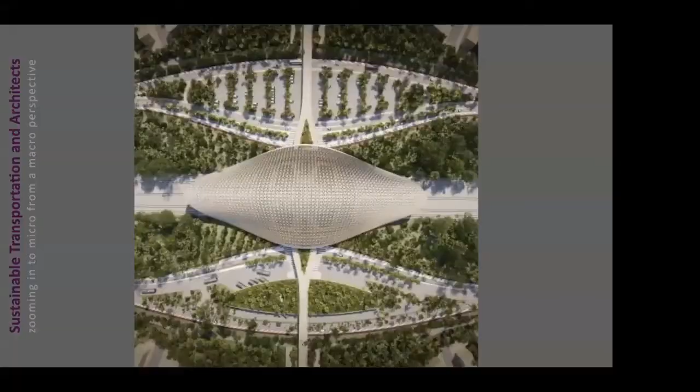So, when I talk about public transportation, like I said, the spine of any public transportation is always a railway. But when you talk about SDG goals, right, you're not specifically talking about any transit system. It is a goal that is at a macro level, at 40,000 feet. So the relationship with those goals and how those goals can be pragmatically applied or come to fruition is what I'm trying to dissect today.

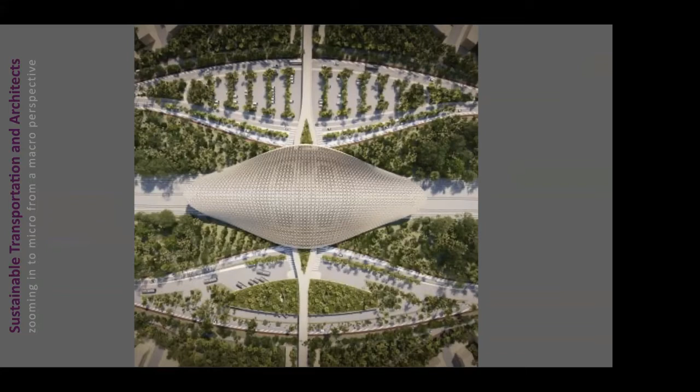Now, I do not know whether that is possible here, but is it possible to understand how many of you are specialized in public transportation or have exposure in public transportation? Is it possible for me to know? Is there a system that we can? Maybe sir, we can go through the chat window if they can type, sir.

All right. Okay. So I'm assuming that this is a mix of people in the audience. There may be people who are much more well versed with what I'm speaking about. So please bear with me if I'm repeating stuff that you already know. So let's start with

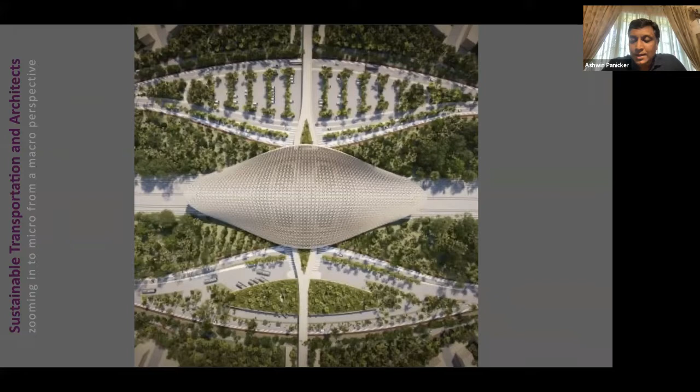SDG goals, right? So SDG goal 11 talks about cities and urban conglomerates, urban settlements, which are inclusive, safe, resilient, and sustainable. I mean, everybody knows that. But essentially, what that means is it has this three-pronged approach, which the entire sustainable goal is approached with, which has an effect on the society, an effect on the economy, and an effect on the environment. Right?

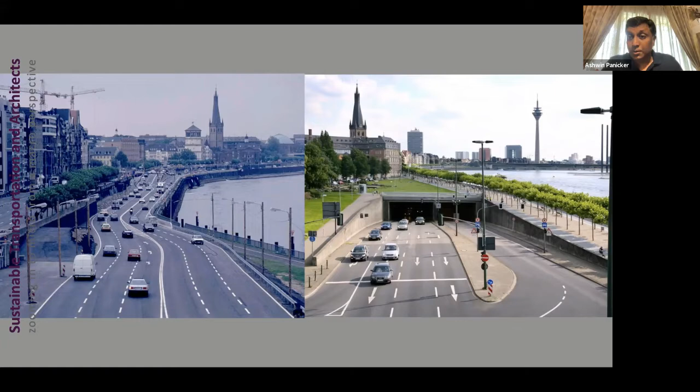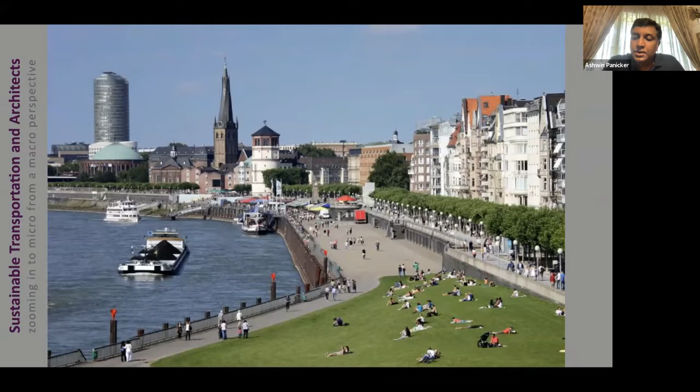Absolutely yes. Unfortunately, that is not the entire essence of SDG Goal 11, because this kind of intervention by urban planners and designers and architects is more of a rich man's problem. They were solving a rich man's problem or a developed country's problem. Good to see, but not applicable for a place like India. I'm not saying not applicable, but when you consider other aspects of finance, etc., it may not be applicable for India, not yet, at least not now. We have a bigger problem. This is more like what we need to tackle, what we need to address.

And therefore, SDG 11.2 specifies scenarios like that. So SDG 11.2 is addressing areas of the world, populations of the world, which have a huge divide between the haves and have-nots. So essentially it is meant for developing countries like us. 11.2 of the SDG goal is about safe, affordable, accessible, and sustainable transport systems.

Now what that means is, if you understand that from a practical point of view, there are two kinds of people. The people who have to do long commutes through congestion and a generally miserable way of transporting themselves from one place to the other, versus a set of people who have a very short, swift, and affordable commute. So this is the gap that SDG 11.2 is trying to bridge, and that is the key essence of this exercise.

So what does it mean? What is that safe, accessible, environment-friendly transportation system? You must have seen this several times. This goes around on social media a lot, and everybody understands this principle. So is it about reducing the number of vehicles on the road? Yes, but it is also no. The answer is no, not exactly that alone.

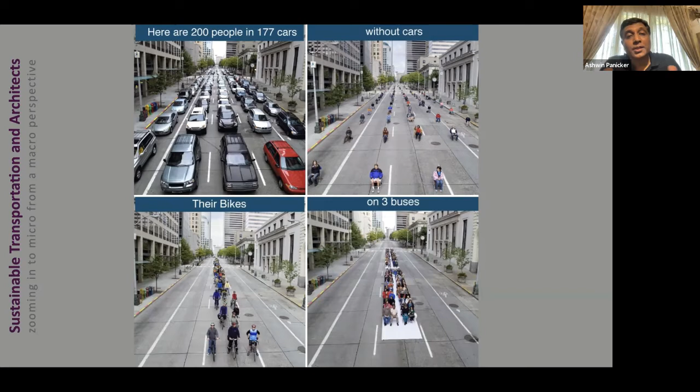This is the solution of engineers. What you see here is the solution of engineers, right? Or maybe it's a completely technology-driven solution. I mean, there is another line of thinking. Maybe if you give it to your automotive engineers, probably all of these 177 cars would be Tata Nexon or some sort of EV now, and then it would be considered environment friendly by some. But that's not what we are aiming for, right? Essentially, what we are aiming for is that inverted pyramid of sustainable transportation system.

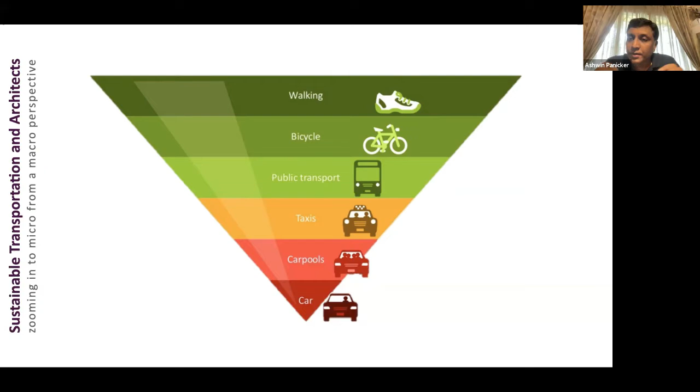So I am convinced, with my experience that I have had with similar projects, that this project, although on paper it met a lot of these goals, in reality it did not achieve what it could have achieved because of lack of designers and architects that should have been part of this. It looks like an engineer-driven project.

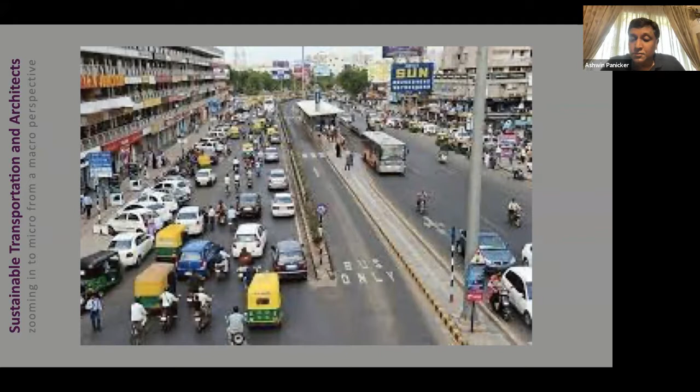Now, I'm not sure how many of you are familiar with the case study of Bogota. Unfortunately, we are not a live audience where I can have that interaction. I'm assuming a lot of people know. Nevertheless, I thought that it would be a good thing to just take a look. I'm going to run a short video. I'm not going to keep it too long, maybe 3 minutes or 4 to 5 minutes.

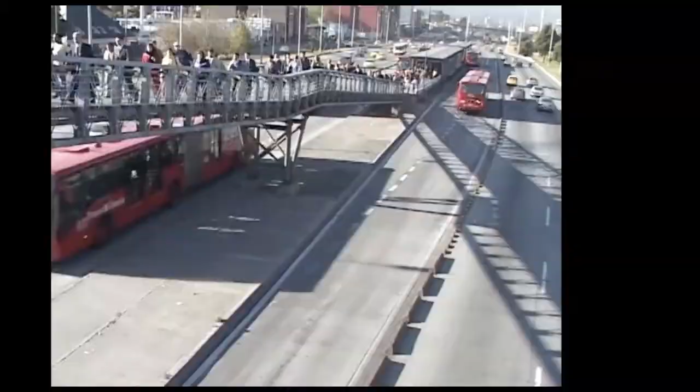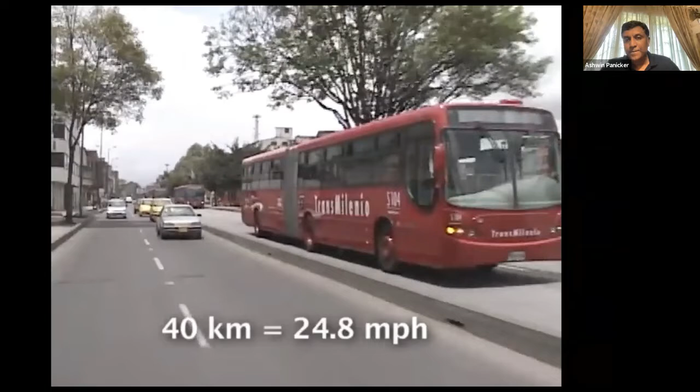Wow. This central hub that we visited dispatches the buses. It follows them around the city in real time. They can communicate with drivers individually. You see a photo of the bus driver pop up on the controller's computer screen when he's getting ready to talk to that guy, if buses are starting to bunch or stack up together.

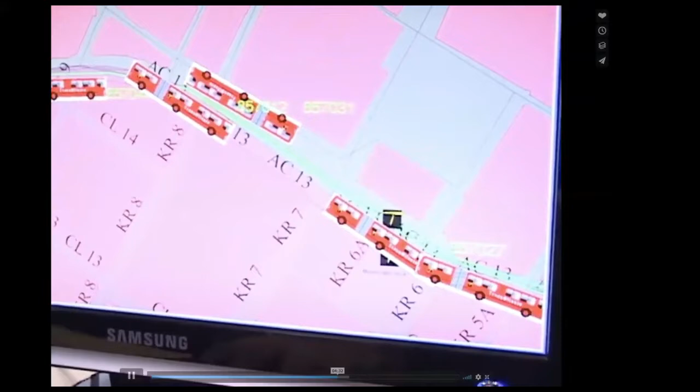Most of the Transmilenio system are these double long red buses, but traveling around through city neighborhoods, you see these much smaller green buses, and those are called feeder buses. What the feeder buses do is they travel through neighborhood streets and pick up people and take them to the bigger bus stations.

One of the interesting things about the green feeder buses is that they're free. You don't pay for your Transmilenio ride until you get to the bigger bus station. That's one of the things that really speeds up the loading and the unloading, kind of like the subway in New York. You're paying for the bus in the station rather than...

Hello? So I hope you can hear me. Hello? Yes, yes, sir. Yeah, so I'm cutting that video. It's pretty long, maybe another 10 minutes to go.

But then I wanted to cover a couple of things that they have done very well. This is a perfect example of taking a technology which is considered to be inferior to a metro system, but that is easily applicable in a city like Bogota, and applying a number of factors that we seem to be missing in projects that we implement in our part of the world, which is seamless connectivity, the last mile connectivity, intermodal transfers.

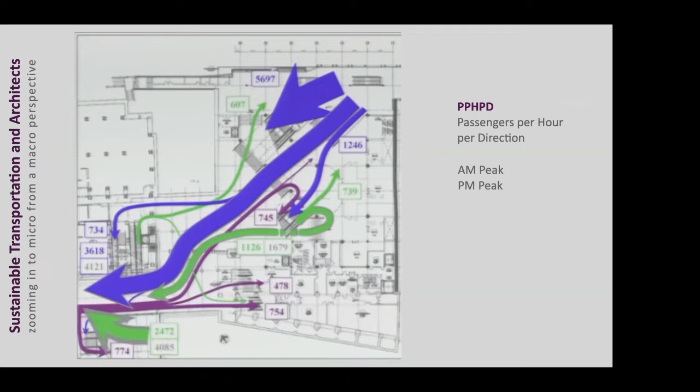So to give you perspective, this could be very, very different. We have our Bombay Shivaji Terminus, earlier called Victoria Jubilee Terminus, which is one of the largest stations in India, and carries, I believe, about 2.5 million people a day. Now compare that with Shinjuku Station in Tokyo, which is considered to be the busiest station in the world. They cater to about 3.5, nearly 4 million people. 4 million people in a single day through one station, and that is multiple times the population of some of the big towns that we know of, right? So the scale can be very, very different.

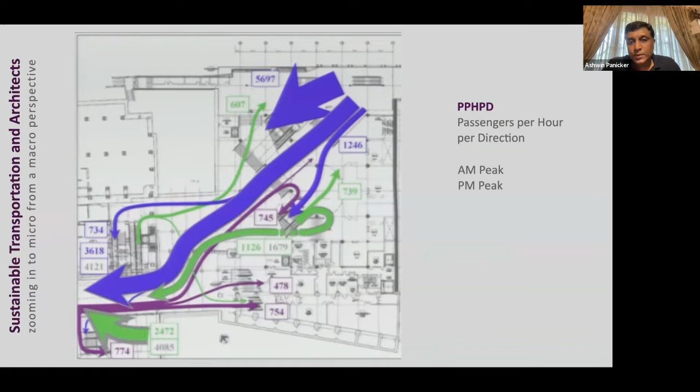So compare that with maybe Bangalore Metro or even Cochin Metro, where we are talking about maybe 4,000 or 6,000 persons per hour per direction. So the scale can be very different, but essentially that is your unit where you start with, right? So that is where you start putting things into place.

So typically this is where the question arises: where do architects come in? At what point do architects come in into a project? Now, I'd like to share a little of my experience when I went to Singapore. When I joined the Land Transport Authority, it had a legacy of having been, from the British colonial days in Singapore, the Public Works Department, and that eventually evolved into the Land Transport Authority it is today. But what that also meant is it was a very engineer-driven organization. The decision makers, the people at the top, were all engineers.

I started in the architecture department. We had a very strong architecture group, mostly British people who were working there at the time, but extremely efficient people. However, what I found is it was always a tough call to make a decision in a project, because you have a massive team deciding on all aspects of a project, and it was engineer driven. And architects were mostly, at least in those days, considered as people who would decide the color of the station, or maybe the furniture on the platform, or the bollards on the walkway. I mean, we were the interior designers to most of the engineers. That to me was very annoying.

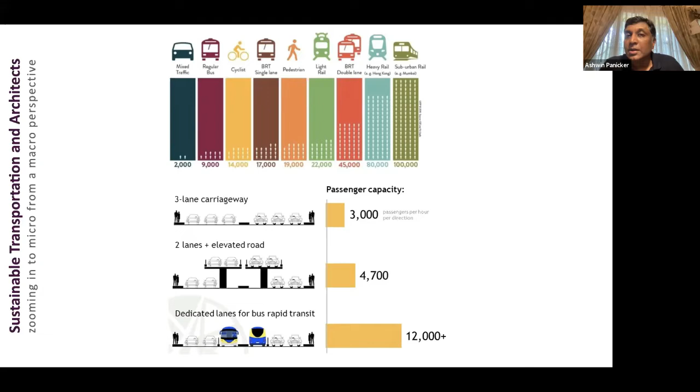Please do not misunderstand me. But then there is an element of sensitivity. There is an element of detailing that architects are able to bring in. And so that's the point where you come into the project and you make interesting scenarios. As an architect or a designer, you start opening up interesting scenarios which may not have

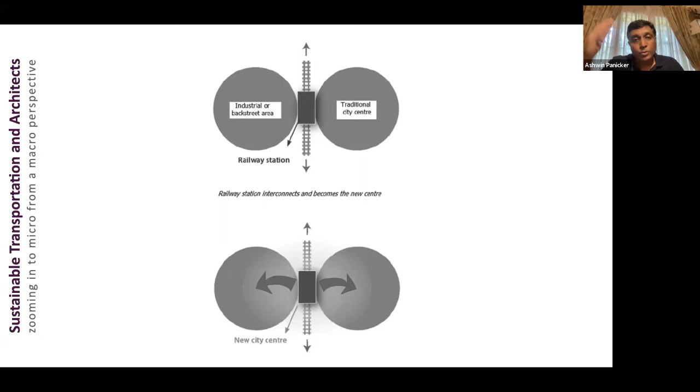been considered before. For example, you could have an architectural solution which could possibly bridge two diverse areas of the city and unify them, just like in the sketch that is shown on the screen now. So when you want to go into that kind of detailed solutions, certainly architects do have a better grip than people who look at it from a huge macro scale.

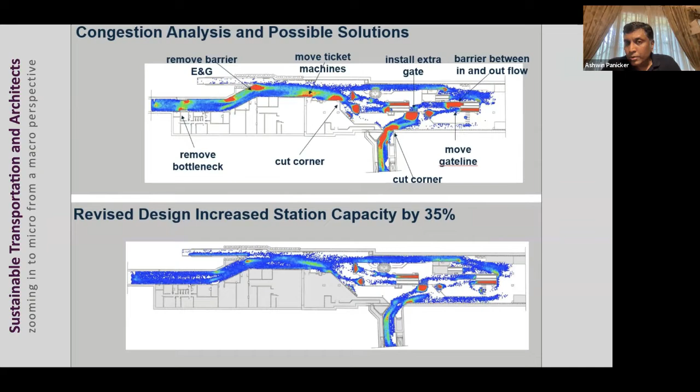And then, of course, before you make any major decisions, you start analyzing the impact of your structures, or how you plan to intervene into that ecosystem, into the environment, and how your built structures are going to affect the pedestrian movement or the passenger movement or the vehicle traffic. You start analyzing that, and you start massaging it and making it as smooth as possible. I will cover this a little more in detail a little later.

This is also, I believe, the best time for interacting with the community, because as public transit architects, you are touching human lives much more than anyone. You are interacting with the community, with the culture of the place, and you can make a positive impact. This is a project that I was involved in. It's called Hougang Station in Singapore. It's somewhere in the suburbs of the city.

What you see on the wall are actual handprints of the local residents. So 5 years before the project went onto the ground, we established an art and transit project, and we started interacting with the local people. We involved them, the community participation, in certain decision making of the project. As part of that exercise, we went on for 6 months, I can't recall how long, but a pretty long time, where we got prints of actual people on rubber molds, and later all of those molds were translated into concrete panels like what you see here.

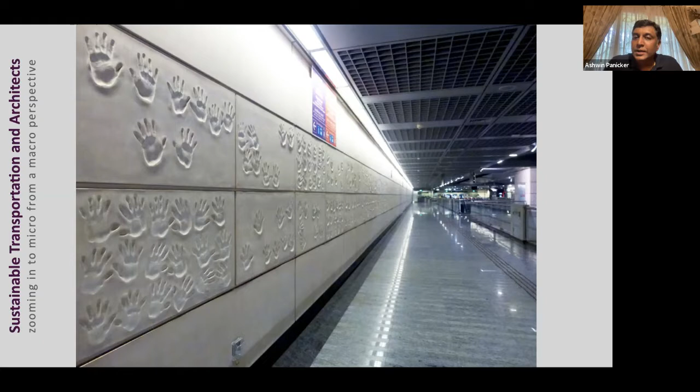And it is very interesting. I used to live near this station for some time, and it was very interesting to see common people walking by and just trying to see, hey, is this my handprint? As a result of that, the sense of ownership of the local community towards that station is far higher. So I'm just showing this as an example of the difference a little bit of architectural intervention can make to the community in inserting a public transport system.

Places. We all belong to places, right? The roots of our identity are places where we come from, places where we studied, places we met our girlfriend or wife. Places have a huge impact on our lives. Therefore, as designers and architects, we have a responsibility in how we intervene a public transit system into an environment. Some examples from around the world of how each of these has been built, and each of these has a statement. These are all statement pieces.

Victoria Terminal was obviously a statement of colonial powers. It was a statement to show who they were. The project on this one, Serangoon NEX, was a project that I worked on. This was a suburban town in Singapore that was revitalized with a transit-oriented system, where the transit systems, including a bus interchange and a couple of metro lines, were superimposed with commercial and residential facilities, and it transformed the whole place. And of course, this is the Pune MRT system in our country, which is trying to establish a new language, a new sort of paradigm in that environment, looking forward.

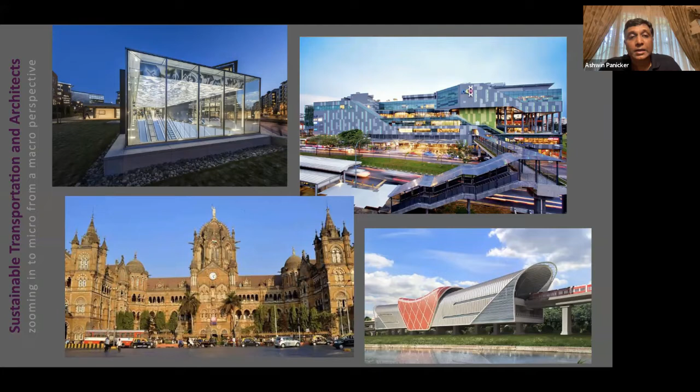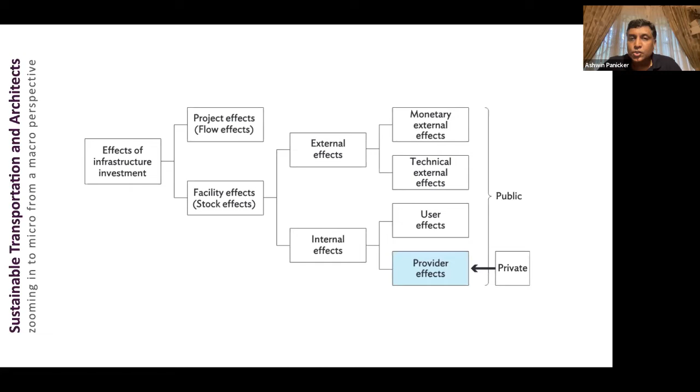Monetary external effects are things like, when you put in a project, what would be the appreciation of the land around it? What new commercial ventures would come as feeders of this project, etc. So what I'm saying here is, all of this has a bearing on what architects can do, should do or would do. All of this has an effect on what we can control, manipulate or contribute to.

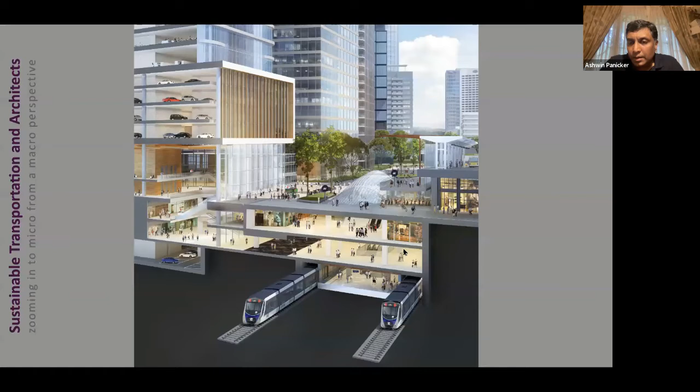Best example for that is transit-oriented developments, right? So this is a success story in all parts of the world. This is a cross section of transit-oriented development. It's of course a conceptual scheme in Jakarta, Indonesia, where the metro system comes in, and there is a residential complex and commercial complex all coming together and utilizing the open space on the top to create green spaces for the city and enhancing the quality of

life there. So transit-oriented developments, in my opinion, are the ones that we should be looking at in every urban environment in India, particularly in India where we have high densities of population and land is very scarce, and we need that kind of revitalization in more cities. One country that has taken this to almost a level of perfection is Hong Kong. It's not a country anymore, by the way.

So this is, I'm not sure how many of you are familiar with this, but this is the famous Kowloon Tower in Kowloon, overlooking Hong Kong Bay. This is one of the best transit-oriented projects that I think ever has existed. So you look at the number of levels that are going under. You have the MTR, or the local metro, that is in the lowest basement, and then on top of it you have an airport express line.

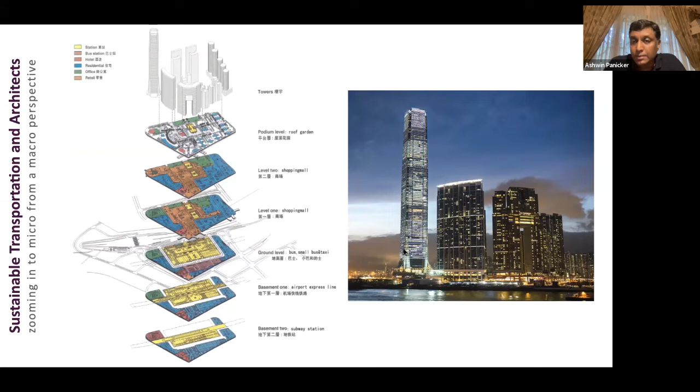So seamless transfer, seamless modes, interconnecting several modes of transportation. It is also right next to the water transportation. So this is one of the success stories that we have seen in the world of transit. I'm sure there are several others. Even in India, we have several others. But in terms of having perfected it to near perfection, this project, in my mind, goes right up in the list.

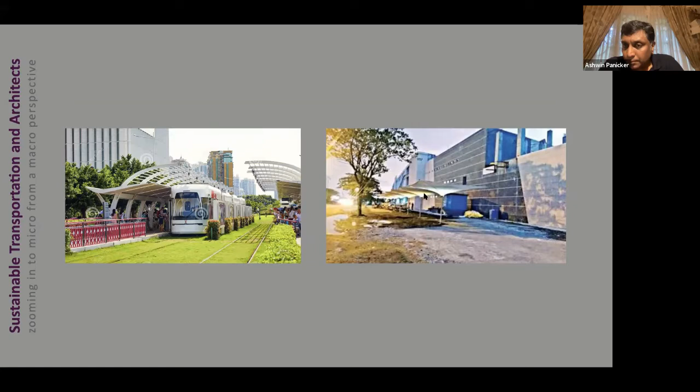We also have very innovative projects, like this one right here in our country. It's Nagpur, where the canopies that you see here are quite an innovation. It captures the rainwater and also has solar panels to give light at the bottom. So even that small little innovation makes a difference to the environment and also increases the quality of life there. So there is no limit to applying environmental factors to a project, not just by choosing the right material. And so there are several things that you can consider.

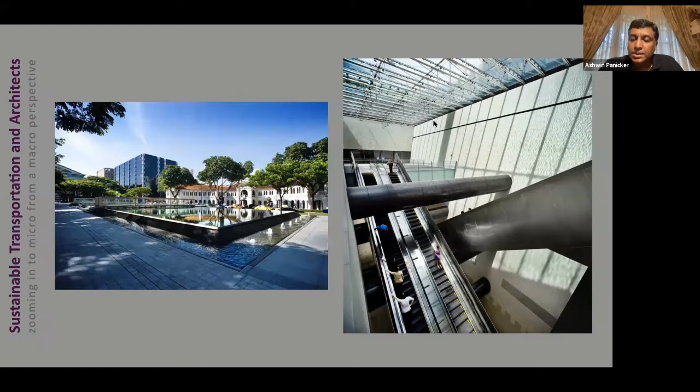The other important aspect, which is a personal peeve, and I believe this is something that all academics in India should give a little more attention to. Certainly my professors, when I was a student, or at least my curriculum, did not provide that kind of impetus on this topic, which is sustainability of assets. That's a fancy way of saying thinking of maintenance.

Maintenance is something which, I'm not sure how it is now, but at least when I was a student and when I was practicing here, never figured very high in the scheme of things in an architectural design project. So for me, it was a new experience when I went there and found that if you're designing fancy spaces as a designer, if you're putting three-story or two-story high spaces, or you have fancy materials that you've chosen for your project for whatever reason, it is also your responsibility to ensure that this has a good life cycle.

This has good maintainability, and it can be maintained with minimal intervention or regular intervention, and it is an architect's responsibility to give that maintenance regime or program as part of the project design. Something which I have never seen, at least 10 years ago, 20 years ago here.

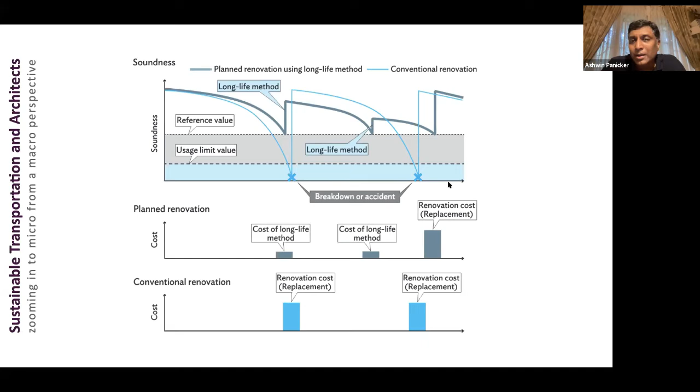Whereas the method that we should be following is a long life method, where there is a clear maintenance regime, and that carries through with minimal cost to the exchequer or the public funding. So this is one of the things that are missing in our system here.

Movement. The most important aspect of a public transit system. Moving people, moving traffic from point A to point B. And it is all about numbers. In my opinion, the prime metric that should define a transit project is level of service. For those of you who are not familiar with level of service, this is a metric that was developed by John Fruin almost 60 years ago, I think.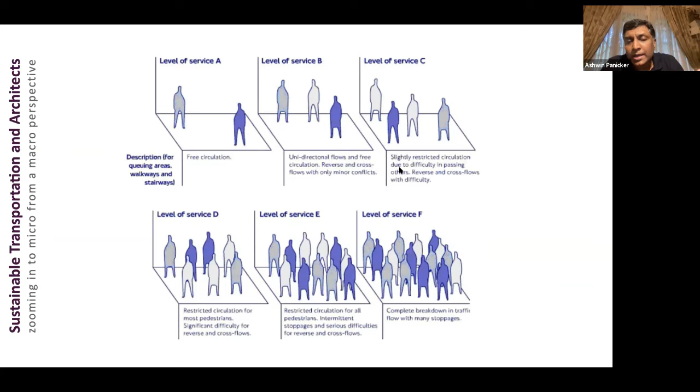This was first adapted as a metric by the London Underground as a standard for ensuring quality of service provided by a public transit system. So level of service is divided in 6 categories, A to F, and as you can see in the figure, level of service A is when you have the freedom in a defined space to move in any direction that you want. There is nothing to hold you back.

You can move at the speed you want. You can change directions the way you want. Nothing to stop you. That is complete free circulation. Level of service B, a certain direction is restricted. Level of service C, maybe more than one direction is restricted, and so on. By the time you reach level of service F, it becomes practically impossible to move at your volition. You would rather be led by the crowd.

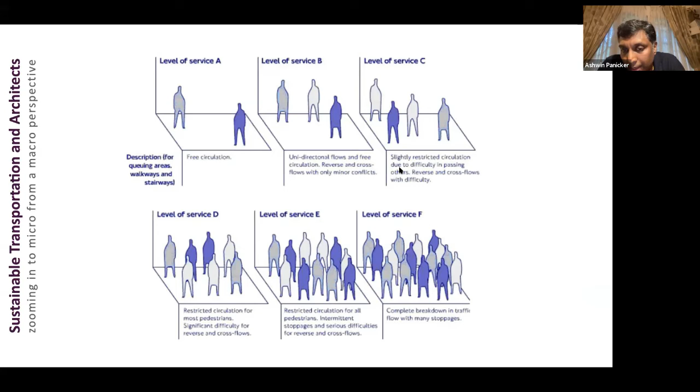And that is the same metric typically used by traffic planners, urban designers, and also architects. It is practically the same thing, right? In the case of pedestrians in a public transit system, you look at pedestrian flow or density. If you're talking about rolling stock, a bus or a train or a tram, you're talking about density. If it's a pedestrian path or a corridor, then you talk about the flow rate. But essentially, the principle is the same.

In many parts of the world, including the metro systems that I was part of, if you reach level of service D, then things have to be changed. A panic button starts becoming active. There are very clear interventions that the authorities or the operators would need to put in place to increase the level of service. If it reaches F, practically everything stops.

Both in Singapore and Dubai, if level of service F is reached in a metro station or any public transit system, the system is shut off, at least temporarily. And that's because it has the potential to become a risk to life. Stampedes can occur. So when you reach level of service F, everything stops.

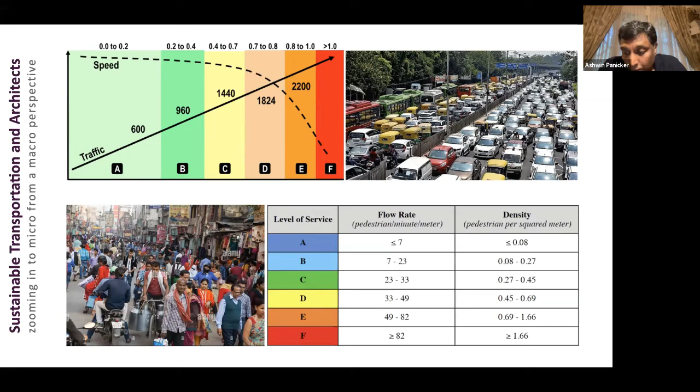Now, how do you tackle this? How do you design this into architectural projects? Today, unlike 20 years ago when I started in this domain, there are a lot more tools available. Computing power and simulation processing power have gone up, and you can practically come up with any kind of simulation. In the good old days, what we used to do was work on pure density, square meter density calculated by formulae manually.

But now you have simulation software where you can actually determine the kinds of personalities, the personas, the avatars that are introduced into a system. So you can design a public transit system or a public space. It doesn't have to be a transport system. The same software can work in the case of a stadium or any public gathering for that matter.

The interesting fact is this pedestrian simulation software or engineering got an impetus. It started developing at a fast pace after a massive tragedy. This is quite a long time ago, 1989, in a county called Hillsborough in the UK. There was a stampede in a football stadium where 97 people lost their lives. Now, it was a simple thing. It was just a brawl or a fight between two people. Somehow the stampede happened and people started trying to get out of the stadium. Everybody reached the doorway at the same time, a bottleneck happened and people were crushed to death.

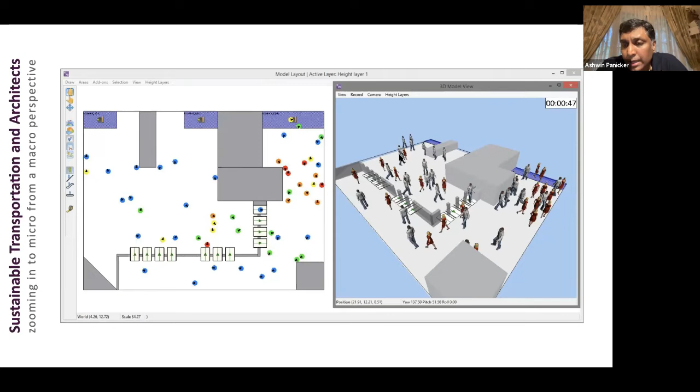So that was the beginning of pedestrian simulation software being introduced into any project that had massive movements of people. I was responsible for introducing this as a mandatory requirement in any transit project in Dubai. It is written into law that if you're having a massive public transit system in Dubai, it has to undergo a pedestrian software simulation. It has huge impacts on saving costs, enhancing user experience, and so on.

So can we take care of this? This is what we have. Is it impossible for us? Absolutely not. It is just a matter of applying the right principles, looking at details, and introducing solutions that are sustainable.

So to give you an idea, I'll show you a 1-minute video. This is definitely not a promotion for this software. This software is called MassMotion, which is at the moment quite the world leader. There are several other software packages available as well. This is one of them. But for those who may not have seen how simulation software works, I'd like to take 1 minute of your time and show you that.

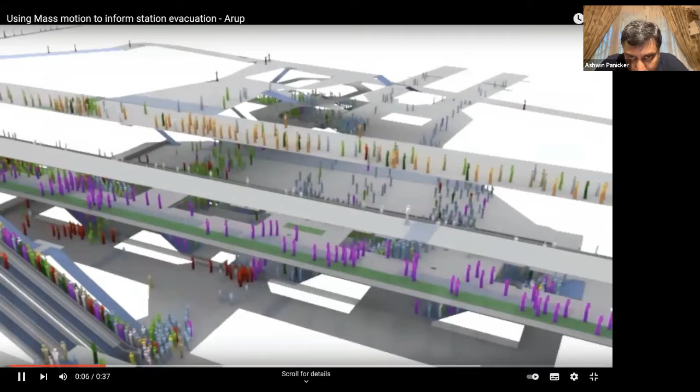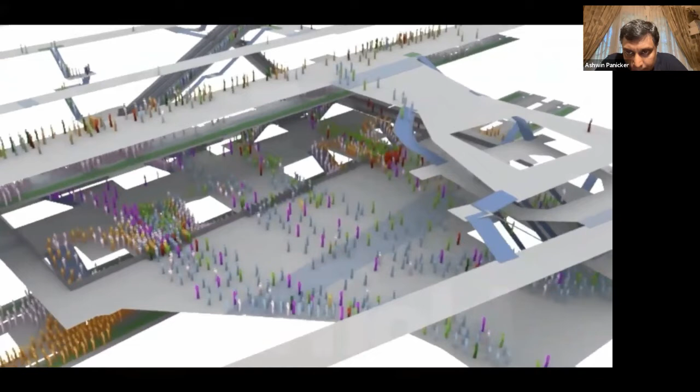In this video, MassMotion is being used to simulate the evacuation of a busy subway station. Each person is coloured according to where they originate in the environment. MassMotion uses a sophisticated navigation system that enables the people in the model to avoid each other and obstacles while finding their way toward their goal. This route finding is based on the automatic extraction of the pedestrian network from 3D geometry. The people will continue to monitor their progress towards their goal, making route adjustments as necessary until they've reached their exit.

Right. So you get an idea, right? That's a very, very short video. But then you understand how spaces can be planned.

Sorry about that. So we're almost done.

So essentially what I'm saying is, as architects we can make interesting inroads into the design projects that we undertake as public transit architects, right? So talking about pedestrian simulation, back in Dubai, when we were developing the Airport Express line, I was also leading the committee to fix the standards of design and planning for railway projects in Dubai. One of the things that was very interesting is something as simple as the pedestrian speed of walking, right?

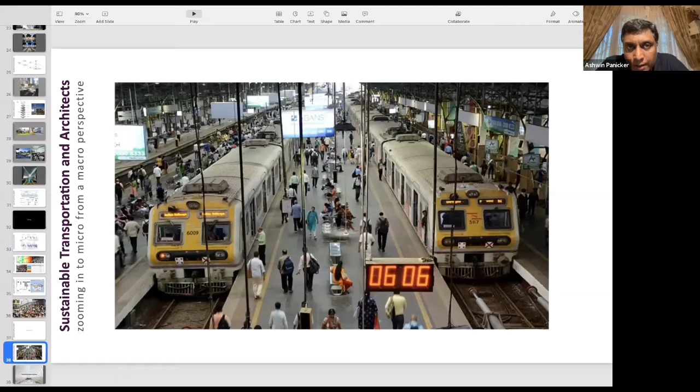But then when you look at different cultures, it becomes very interesting, because one of the things that I have noticed in Dubai, in the Middle East, is that there is a huge gender demarcation, right? So the men walk together, the women walk together separately. The men have a different speed, the women have a different speed. Both of them have a different speed to the rest of the population because of the kind of clothes they wear.

Things like that. Imagine in this crowd of people, if you introduce a person in a wheelchair or a geriatric person whose mobility is very reduced, what would happen to the movement of the crowd? Will that person be pushed aside, or will there be enough space for people to move around her? All those things can be simulated in the pedestrian simulation. The micro level to which we can go is incredible as architects, and that makes a huge difference to the user experience in any public transit system.

So when you talk about public transit systems, there is a certain journey that you have. It is all about architects coming to public transit architecture at the point where people change modes of transport. Every time there is an intermodal transfer, there is a role for the architect to play. The moment a pedestrian gets onto a bike, there is a design need to understand where the bikes are parked, how they are taken and introduced into the public, all of that.

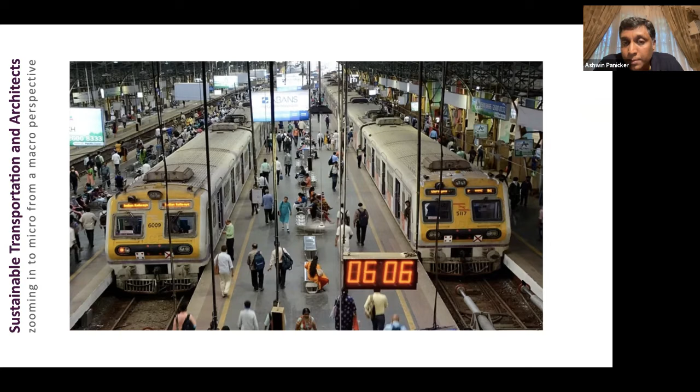So a 100% intuitive project may not be the ideal, because you always have a significant number of people who have special needs, people who are aged, who have physical disabilities, who are pregnant, who are traveling with kids. There is a percentage of our crowd which does not have the same ability as we do, and therefore we have to approach public transit architecture design in a way that caters to them as well. It is about an intuitive design with some support.

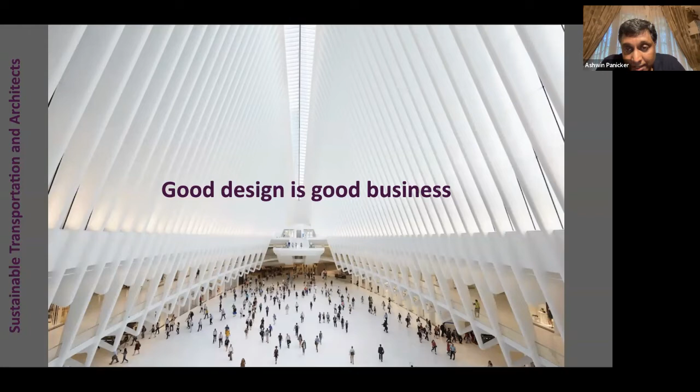So this is a famous dictum, right? Good design is good business, but I would modify that and say good design is good for society, economy, and environment. And that is our Sustainable Development Goal number 11. Thank you.